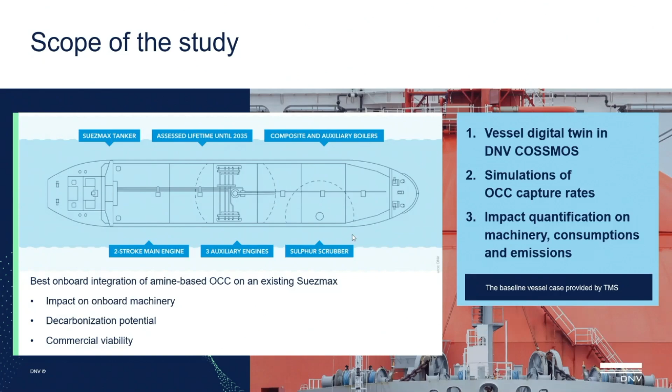So in order to do this job, we created digital twins of the vessel without the technology and the vessel with the technology, and we compared these on a simulation basis. What is the benefit? The benefit is that we don't focus only on the system, but we see how the system interacts with all the rest of the systems on board the vessel. And therefore, we can quantify the machinery implications. So let me go through the details of the study.

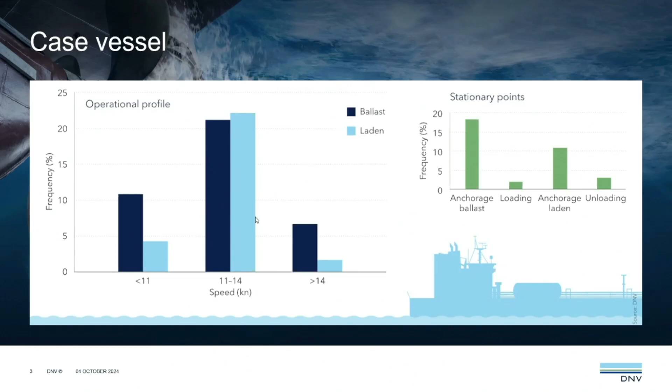The operational profile was analyzed over a number of years, and we have defined exactly how much time the vessel spends in each and every operating mode. We modeled the carbon capture system, which requires, apart from space on board, heat. It is a typical amine absorption system, which scrubs the exhaust gas stream, collects the CO2 into the liquid, and then the liquid is regenerated in order to be reused, and the CO2 gas is liquefied and stored on board in a tank on the deck.

So as you can imagine, the very first constraint that we needed to account for is the space on board the ship in order to place all these different components. The second very important constraint comes from the supply of steam, which is necessary in order to regenerate the liquid flow and reuse the scrubbing water. The scrubbing water is not just water, it also includes an amine chemical agent.

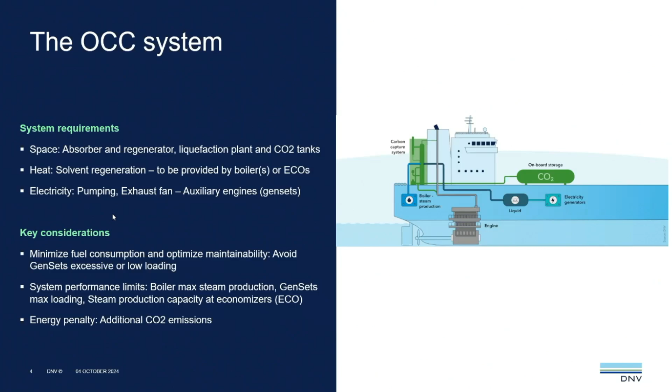And finally, we need electricity, not only to pump all these liquid streams, but also to compensate for any exhaust gas pressure drop in order not to hinder the operation of the engine. And also, we need power in order to liquefy CO2 and store it on board. So as you can imagine, this is a machinery problem in the first place. And the objective is to say, what are the resources on board? What can we optimally integrate in order to have the maximum CO2 capture? And this is what we did.

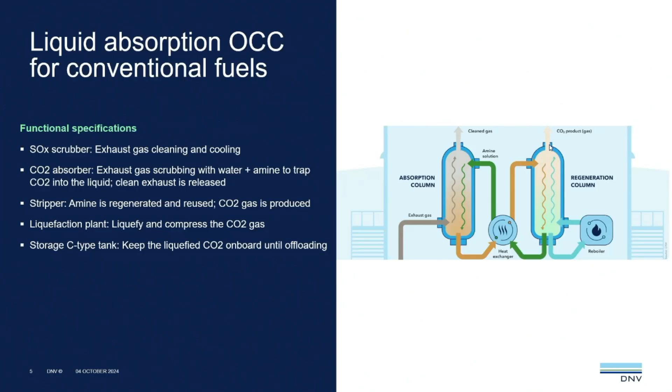This is the technology that I just described. So gas is scrubbed, CO2 is collected in the liquid and then released via heating as CO2 gas to be liquefied on board and stored.

So in order to integrate and improve the technology, the very first, the low-hanging fruit is to supply extra heat from the best design of the boiler. If we speak about a new building, it is much, much easier to optimize the design. So we can do this analysis in the beginning, in the new building stage, and identify what is the right capacity of the components in order to be retrofitted for the CCS system all along the new building lifetime, the vessel lifetime.

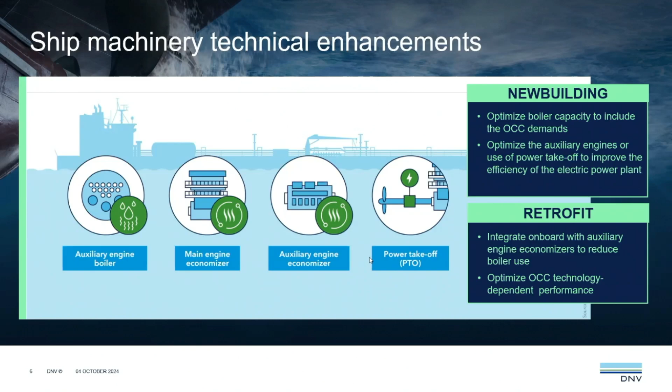If we speak about a retrofit, so an existing vessel, which is the case of TMS, then the limitations are quite many. I mean, we already have a boiler, and the way that the boiler is operated and the constraints that the operation has are already there. So we need to account for all these different details. This is what we did. And of course, many different technology enablers can help out and make sure that we have the right solution, but they affect the economics. So here we try to have the best economical solution in the case of the retrofit. In the new building stage, there are more degrees of freedom.

In terms of the CCS system, we focused on typical amines because, as we speak, most of the pilots on board ships of this kind of technology are amine-based. There are quite some pilots that have illustrated either the capture on board or all along the value chain, the liquefaction, the disposal, etc. There are these kinds of designs, these kinds of pilots, and there are also improvements which are being suggested by many technology providers. As DNV, we are here to support, to understand the technologies and the impact on the machinery, to see the system level perspective. And we are here to support the collaboration between the different stakeholders, technology providers, shippers, etc.

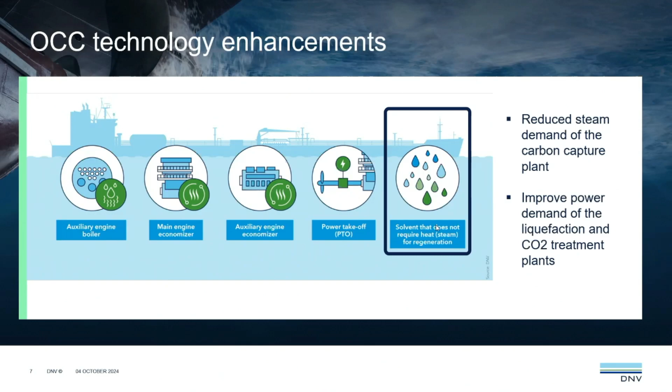So in this context, we considered solvents of different capability, of different heat demand, high heat demand, or even zero heat demand. And we created a few scenarios that we analyzed. The first scenario being a system as you have it right now, state-of-the-art amine-based solutions, which are conventional, no integration at all. How would this perform on board the ship? The second scenario was to optimize the heat system from the ship side. And the third scenario is to optimize everything as a whole.

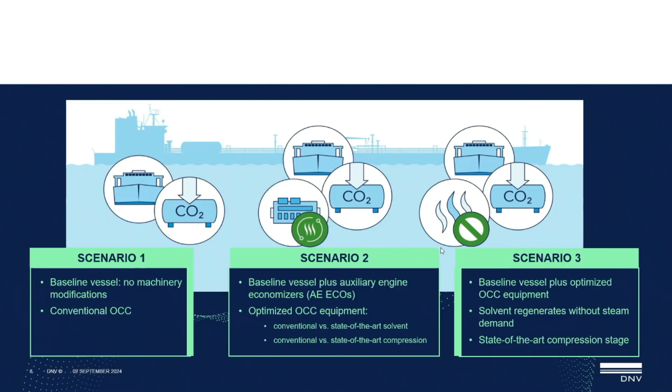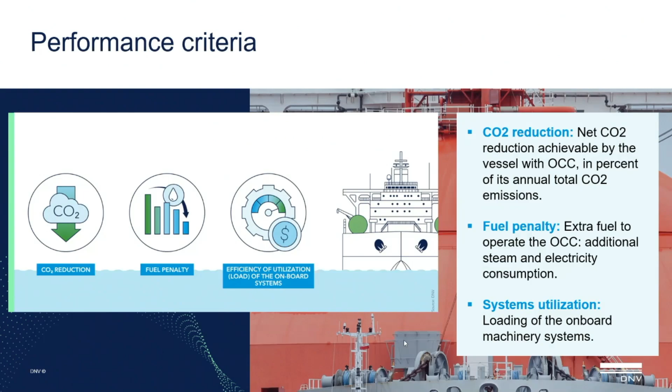And I wouldn't like to tire you with a lot of details, but it is extremely important to define the key performance criteria. First, the reduction of CO2 on a net basis, not only on the system. The fuel penalty, how much energy the system is going to consume, because these systems, like the sulfur scrubbers, consume energy, but not at the same order. And finally, the utilization of the systems on board. So how much the engines, the diesel generators would be loaded, because this is limited. And the operators do not want to operate all the engines during a voyage. So these are constraints that delimit our capacity to liquefy this CO2 stream on board.

The first scenario, this is a typical CCS system.

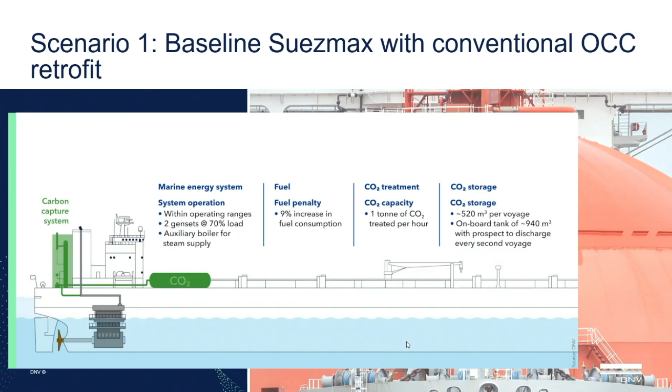Ms. Georgopoulou, please, can you hear me? Yes. You have still 1 minute, please. That's fine. That's fine. Sorry.

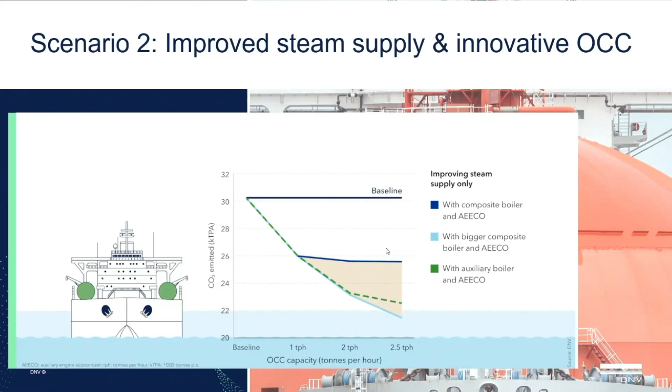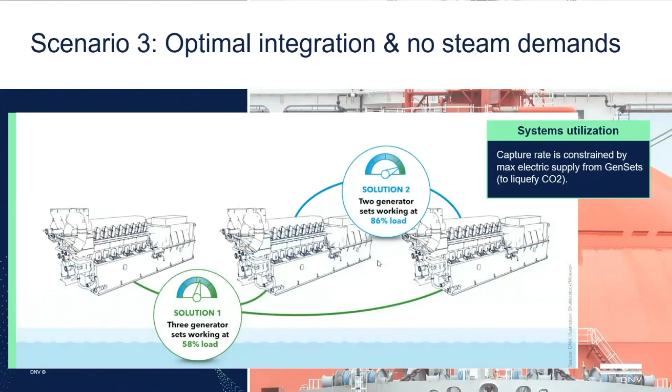The very first scenario achieved 11% reduction. The second scenario, with the integrations aboard the ship, achieved 28% reduction in net CO2 emissions. And finally, scenario 3, which was the optimization of all the systems, took us to 38% CO2 reduction.

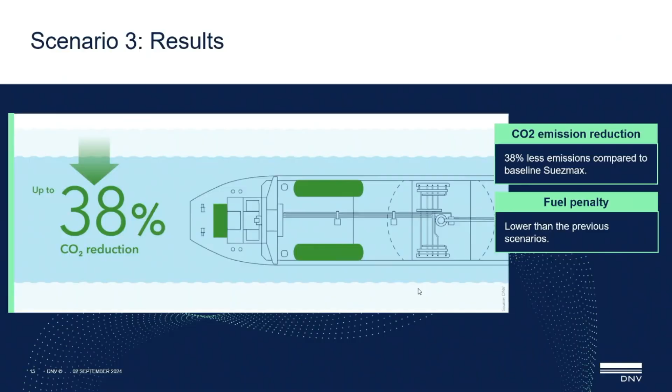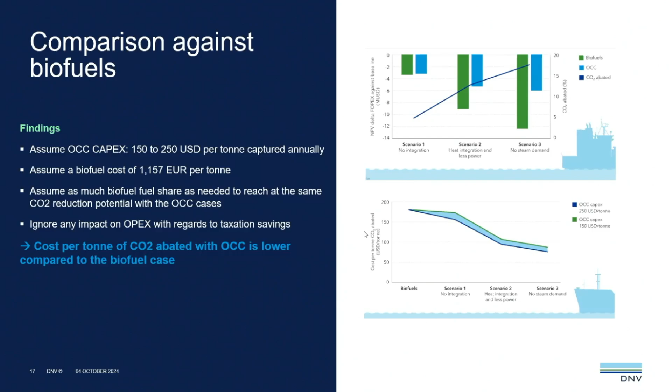So, conscious of time, I'm just going to show you that if we account for all these scenarios and compare them against biofuels, with the existing cost of biofuels and an assumption on the OCC capex, which can be changed, right, we see that there is potential for the technology against other technologies. So this is what I wanted to say, and to conclude with this single slide.